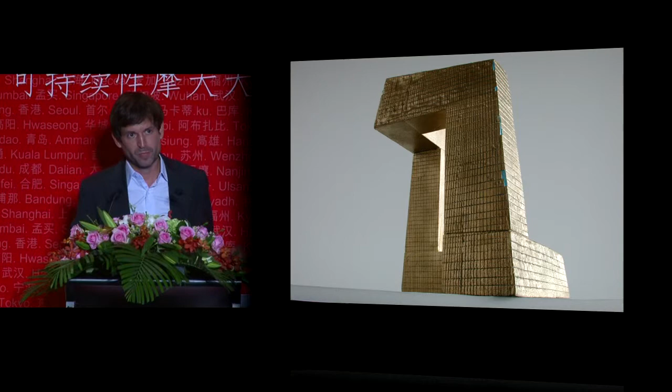And we decided to take the verticality and bend it back into itself, into a loop that would suddenly become a three-dimensional object, engage space and define space rather than absorb space in the form of a needle, but that would also proclaim an inner organization of a building as its very structure and very basis. The idea of a loop of interconnected activities, of a process of collaboration inside a building, a non-hierarchical expression of a system with no beginning and no end, could form the basis for a very different building and a very different skyscraper.

The building is the headquarters for China's national broadcaster, CCTV, and with that contains not only all processes of media production in a single building, but really the idea that the community of the staff of 15,000 people that will populate this building would coexist in this circular and interconnected space.

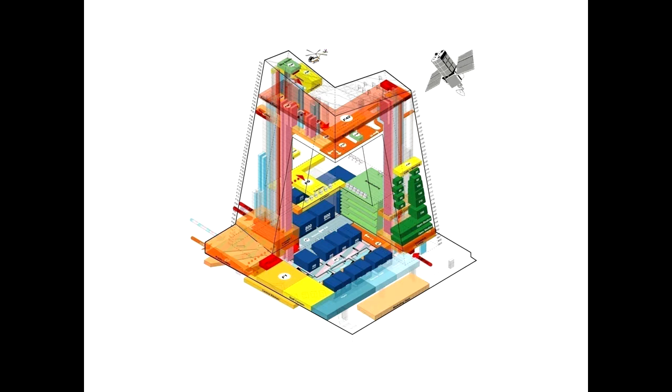I think this is still, in a way, one of the most interesting or exciting images, because it simply suggests in a very intuitive way to look at a building maybe not simply as a building, but almost as an organism. If you remember your biology classes at school and you see those open bodies with organs and circulatory systems, and to simply start to think of a building not as a generic mass, but indeed as a highly specific life form in itself.

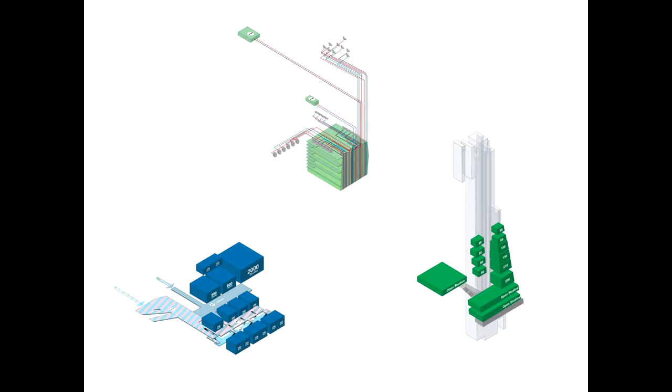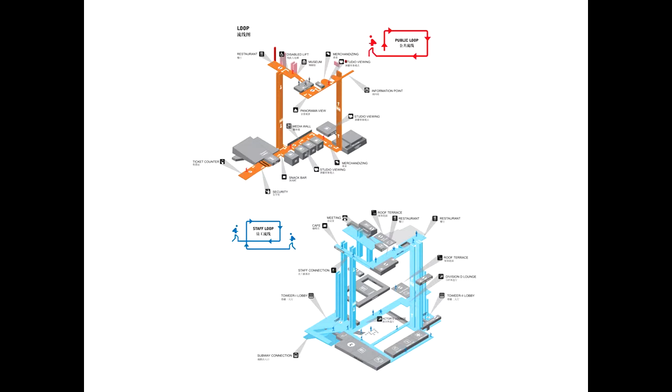And as you dissect this life form, you see the enormous technical specificity that is embedded in this building. But if you then start to reassemble those parts, you can actually identify that it's a system consisting of a series of primary technical clusters for broadcasting, program production, and news, that are interwoven and intertwined with a series of social and communal systems. Canteens, restaurants, cafeterias, chat rooms, meeting rooms, etc. And to comprehend the building indeed as a hybrid of those two that is then threaded together by the loop and circular circulation system of the building.

But as I said, these buildings that we build become bigger and bigger, and I thought it was incredibly important to understand what that scale really means. So with our students, we cut 12,000 little sticks and glued them on our model, simply to understand what a population like that, what a number like that means. We deal increasingly with bigger and bigger numbers, but I'm not sure that we're always aware, sometimes in purely physical terms, what these numbers imply.

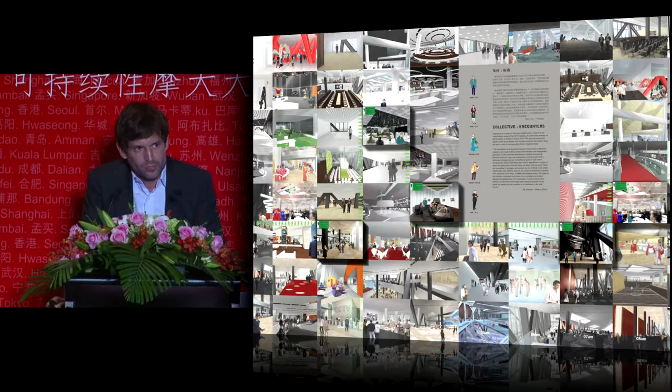And the idea was obviously to think that this building is indeed a collective in its own right and almost has a public in its own right, with this number of people of extremely diverse backgrounds and professions that will occupy the building. We did the entire interior fit-out for almost 5,000 spaces, and in order to again comprehend what we were doing, we created a series of characters and followed these characters on their trajectories through the building as they would use the building, which spaces they would frequent, which paths they would follow, where they would meet, how they would interact, to again start to construct the project as a space of social interaction.

These are, by the way, images of an exhibition I did with the Museum of Modern Art in New York and Beijing, which was again part of an effort to communicate those intentions and aspects of the building.

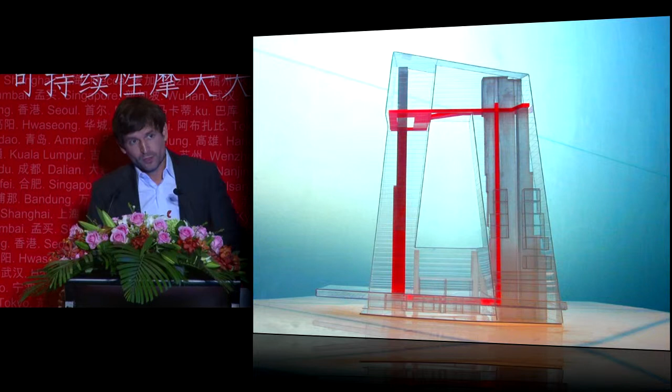But we also went to our client and said it's actually quite a unique situation and a unique possibility we have with this building that for the first time in history really brings the process of media making together. Why don't we open this part up to the public and really offer, if you like, an almost educational experience in terms of media making in real space inside a structure, but how would we also reveal the architecturally exciting aspects of this project?

These are a few images of the now completed building: the main lobby on basement 3, a direct connection to the subway built simultaneously next to the building, and these escalators that project you up to the elevator lobbies, views of canteens in the building, office spaces, and the main broadcast control room, which is actually double-sided. You only see a single half of this, large enough to control the broadcasting of 300 TV channels simultaneously.

But obviously, it's no longer the top of the building that is the most exciting, but simply its most projecting and cantilevering bit. It's the tip of the overhang that cantilevers out, and this part is also going to be open to the public in a visitor's loop, as we call it. And you can see these 3 little circles at the bottom, at the tip of the overhang, and from here you can stand 162 meters above the ground and watch Beijing pass by slowly below you.

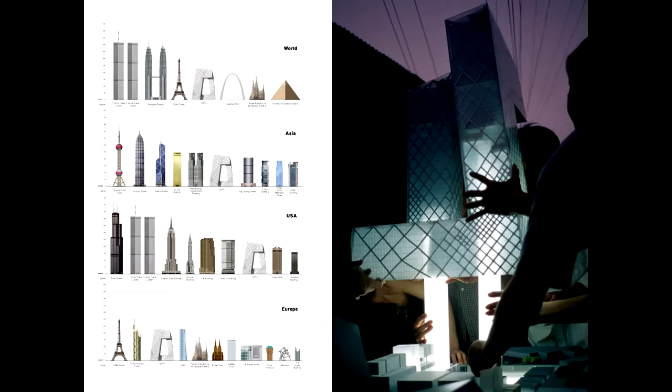But on the left side, I think you see, in a way, the point of the building. That was not about being tall. That was not about having any reference as such to anything, but simply because of its unique rethinking of how a building works and what the inner organization of the building implies to the outer shape, it would assume an identity that would manifest itself in a very different way in all kinds of contexts. And if you look at CCTV, it's here, sort of on your lineup.

I think actually the greatest achievement for me of this building is that it's a huge building that looks tiny. If I look at most of the buildings that are being designed now, everybody tries to make their building look bigger and taller, and 2/3 of the building are inhabited, the rest is scaffolding on top. Buildings are stretched out and made huge and bigger and more imposing. Although it's one of the largest buildings ever built, still until today in the world, when you come to Beijing, you will realize it's actually surprisingly small.

And if you look at what would happen if I unfold this building, it would actually be over 700 meters tall with a floor plate of almost 2,500 square meters. So you realize how big this building is and how small we made it. And I think maybe if we're talking about resources or many things, sometimes smallness could also be a very attractive thing and not only tallness and bigness.

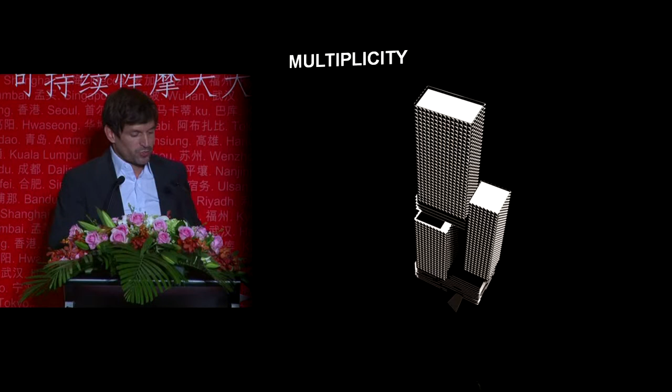A second project I want to present, a very different one, but also a question of what we could do with the skyscraper, and in this case with the skyscraper in a very particular context. This building I designed stands in Kuala Lumpur and actually stands next to the icon. So it's not the icon itself. So it was really a completely different question.

The question was, how can you actually build next to a building, or actually a pair of buildings that have not only been the tallest of the world in the late 90s, but that also gave an enormous identity and pride to a country? However, a building that clearly stands for an era where the power icon was the most important statement of architecture. And the question was, how could we be a neighbor to this? And how could we suggest very different qualities and ambitions of architecture next to those of power and dominance?

The client actually asked me to design 2 towers. One was for them, one was for a different owner. But the first problem was that the site is actually so small that you can't fit 2 towers. The site is tiny.

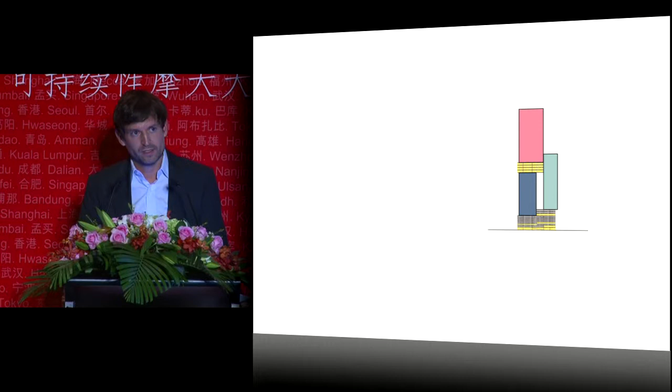Namely, we have those different program components, and why don't we give each one of them their own volume, the residences, the offices, the hotel, and then we slice in between all the amenities, public programs, retail, parking, everything urban we need, and create a tower that suddenly is very different to what is around, and yet at the same time very contextual in the way it can create relationships volumetrically and urbanistically to its surroundings.

The three main building volumes in a way float and hover above those horizontal layers that in themselves are completely open and start to absorb the tropical city, the city that can enter into the building, into those layers, and where we can create a real mix of things. And the idea was to take the street and continue the elements of the street into the building. Usually buildings try to separate things.

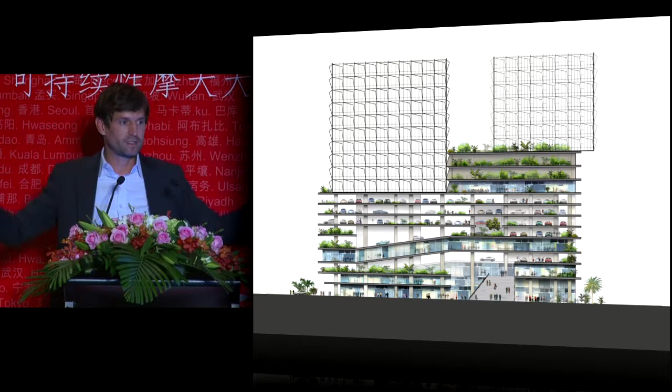The cars go into the parking, the retail goes into this part, and that creates fairly inert and hermetic conditions at the base of buildings. Huge blocks of a retail thing that is enclosed or a parking garage. And here I wanted to continue the rather vibrant and exciting mix of the city.

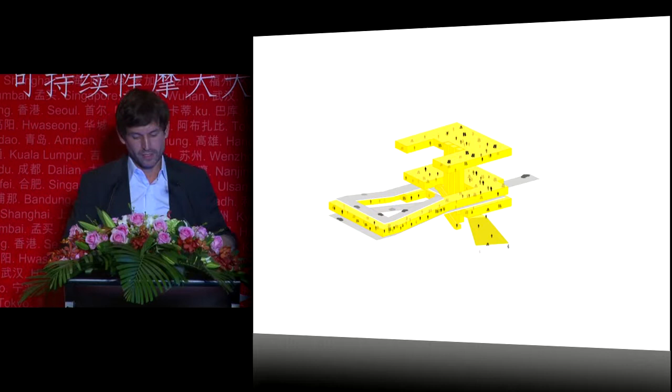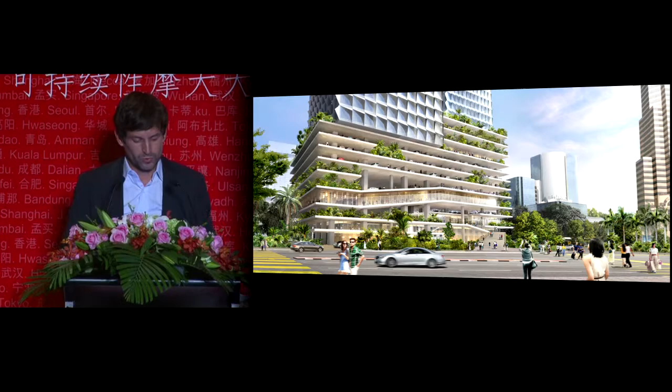So I took the retail, the people, the green, and the cars, and started with a pedestrian spiral that would, with a large staircase, bring the sidewalk up into the building, even catapult people up 10 floors above the ground, and then bring a second spiral, like a double helix, in for the cars that would intertwine, bring all the green and gardens to that, and have a system that in a very open way would be a continuation of the public trajectory of the city.

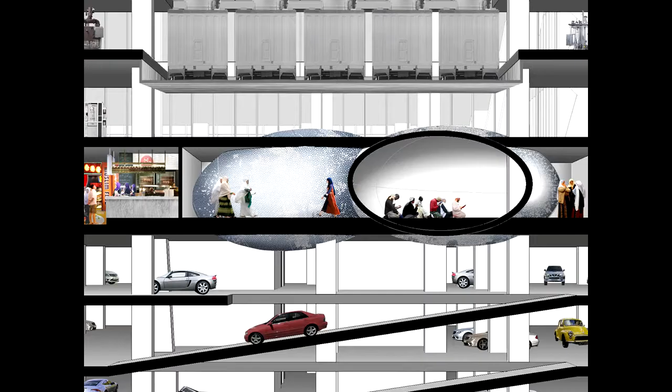And if you look into that, it's a real mixing and melting pot of this multicultural city. We have at the top swimming pools, gardens, we have a Chinese food court, we have Muslim prayer rooms, we have parking, we have shopping. And for example, the Muslim prayer rooms usually end up in janitor closets of buildings, in a way rather disrespectful. We said, why don't we celebrate all the cultures that are here and give them a dignified space in this mix of things inside the building.

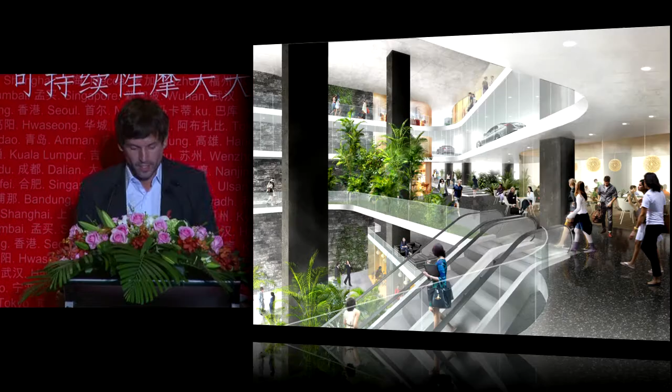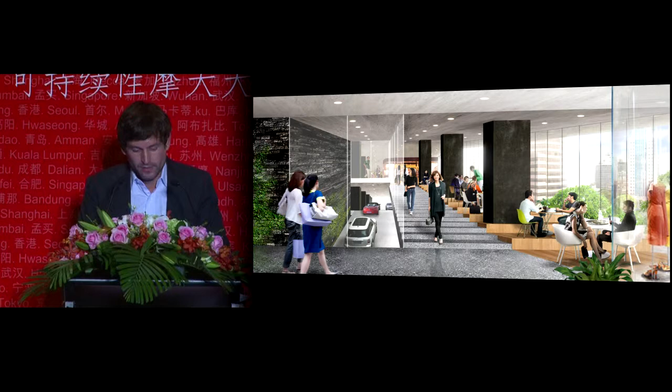And as you move through it, you can see cars drive by, people walk past, you can see the city outside. There's continuously a connection of the urban realities that work so well in the city. Part of this public activity is raised up into the sky and lifted towards the intersection of the three volumes, and also here made accessible to the public the views to the skyline, where at some point you don't simply sell the building that you occupy, but maybe also the neighbors that provide stunning views from what you design.

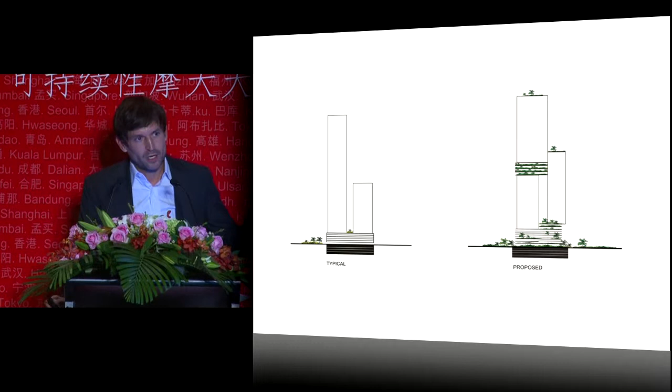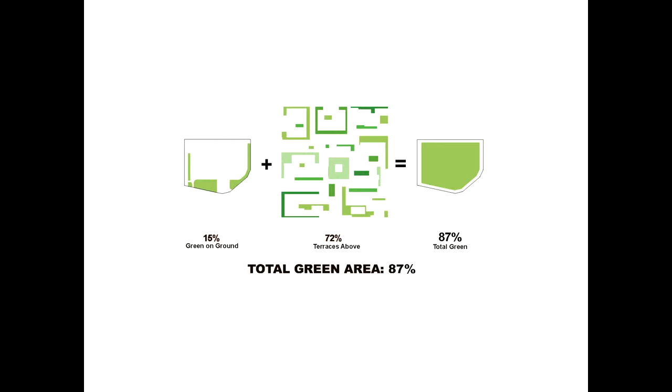Further, shading is very important in the tropics. Obviously, sun is the most important factor to control in terms of energy. And I thought, if sun is the problem, always when you're in a room and you step outside and it's really bright, like these lights, what you do is sort of this, and you can see much clearer.

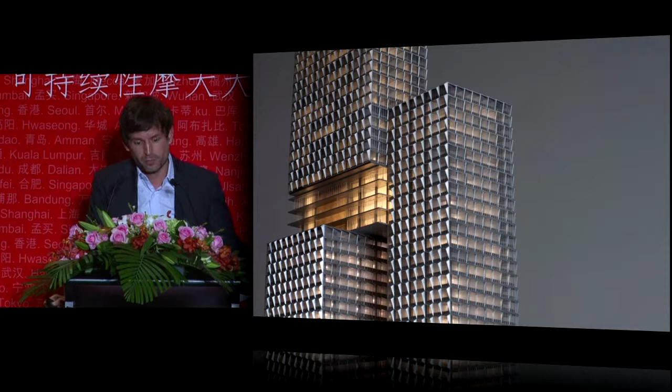And then I thought, why don't we give each window its own little kind of hand shield and develop a texture out of it that we then orient according to the sun's movements and optimize the shading of the building, but also give the building a texture beyond that of inert glass curtain walls that would really articulate the building.

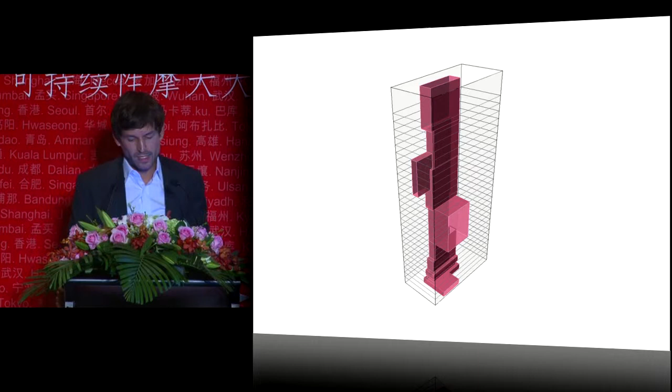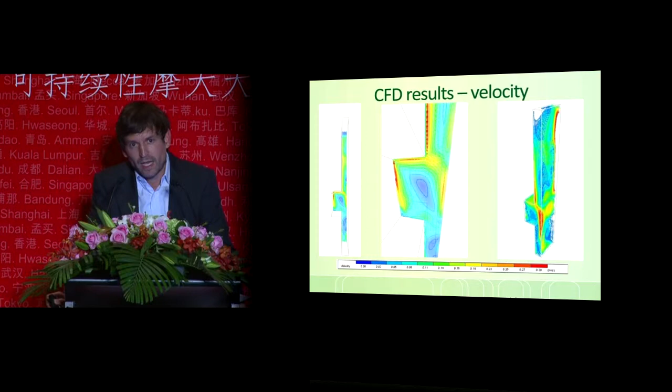In the top of the tower, an atrium in the residential space has huge windows that punch through the facades to bring daylight in, but it will actually also be a naturally ventilated atrium. And simply through the air circulation inside, together with placement of water bodies, etc., we'll be able to achieve air 4 to 5 degrees cooler than the outside. So we're reducing air conditioning loads and other things.

At the very end, very briefly, a project that I still like very much. Maybe the greatest tower of all was Babel. And maybe the greatest thing about it was that it was never finished. It is the idea of architecture as an ongoing process of negotiation of humankind. It is maybe also the symbol of us sometimes thinking beyond our limits. But I thought this sense of a building that was never finished and that was marked by the occupancy of the people that inhabited it was the most beautiful idea for a tower.

The building is in Bangkok. Bangkok is a city in a very interesting limbo between future and past, between roughness and gentleness, between the most incomprehensible buildings that arrive in a very traditional context. And if you look at Bangkok, it's actually a city that probably has the craziest buildings of all cities. It has a robot, a pyramid, an elephant, UFOs, extrusions, these Louis XIV chateau-like vertical monsters.

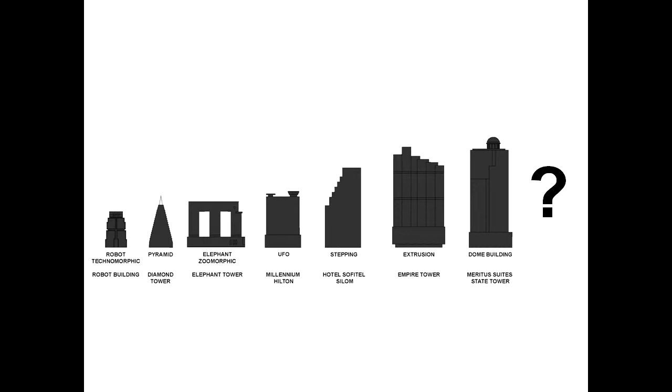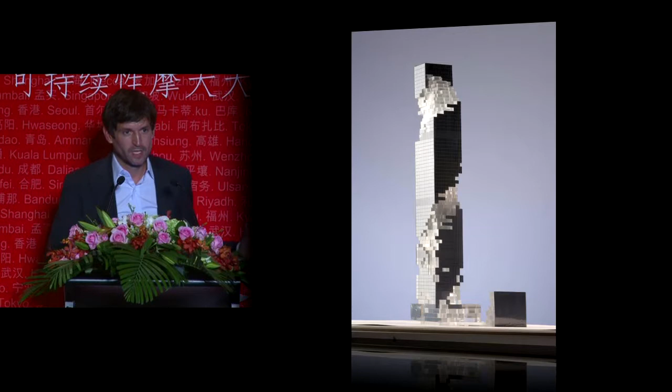And how could you do anything there that would be any different? I thought the most interesting would be to do nothing and just extrude a square shape as a tower. But obviously the problem with the tower is that it is totally disconnected from the city. It says nothing about the life of the people inside. It is a scale that is mute as a totem and has no connection to the smaller grain of human inhabitation. So I thought, what if we take this tower and erode it, take things out, and leave it in a process as if it was never finished or as if it was already decaying.

With this smaller scale of the pixels, you can see how the surrounding texture of the partly still historical city climbs up into the tower, and how the sense of incompleteness marks the building as something that is not only a visual projection of those fantasies, but indeed provides actual space for inhabitation. You see, these are all terraces and balconies of the inhabitants. It's usable space, and it will be the occupants that ultimately animate and activate this building, and their activity will be the image that is projected back into the city.

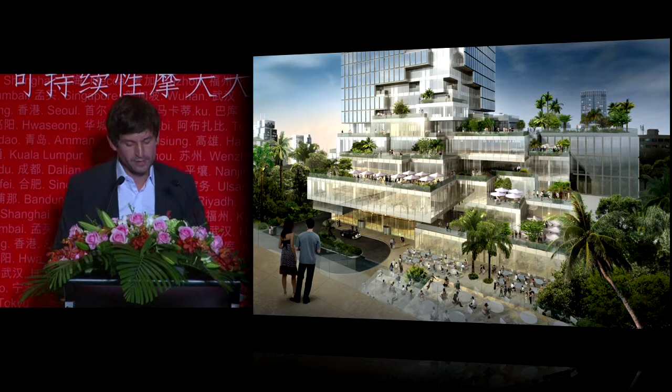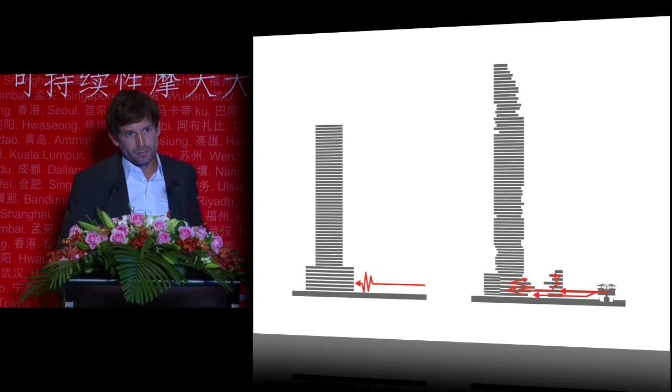As the tower reaches the ground, it doesn't come down in a hermetic block, but in soft cascading terraces with gardens, restaurants, and cafes. Again, a public space that transitions from the harsh urban environment into a more tropical nature zone that simply takes the city into the building and doesn't repel it at a solid base, with the sense that this activity is climbing up and continuing up the tower. The very top of the tower we're keeping free of any equipment, and we believe it will be one of the tallest completely 360-degree open sky decks accessible to the public.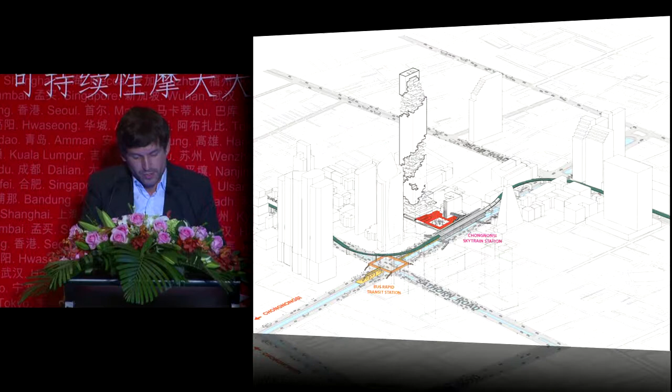But also at the bottom we're creating a large public space, of which there are not so many in the city, equipped with a huge stage tower to stage public activity, but even with the fantasy that sometimes things could happen beyond the intentions of architects. It's connected to the SkyTrain, really a central square in the CBD of Bangkok, and a few views, obviously, of floating in the sky with the pixels and the sense of the tower that maybe never finishes.